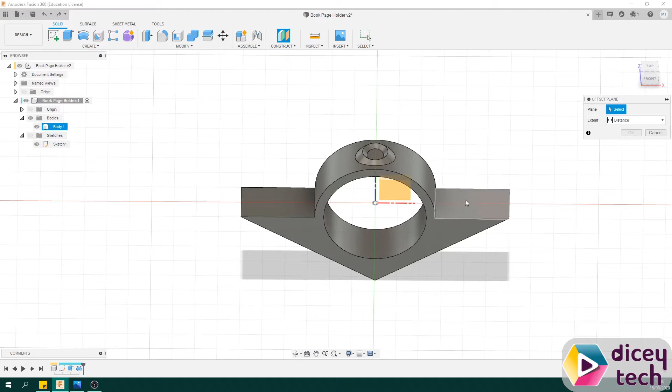First, go to Construct and select Offset Plane. Select this face right here. Drag it up until it says 13 millimeters, then press OK.

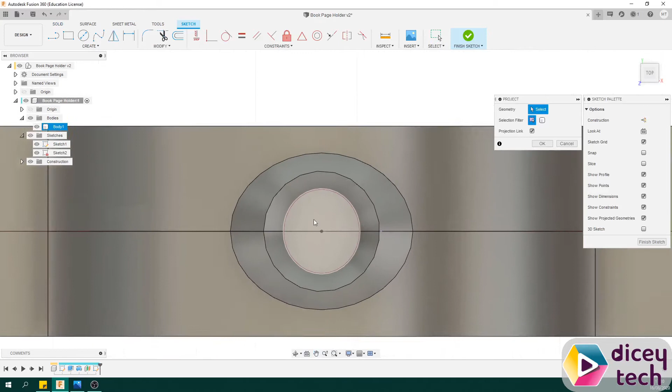After that, go to Create Sketch and select the plane that you just made, which is right there. Now click P on your keyboard and select this circle right here, like that. Then press OK. That will give us the outline of the circle there for reference.

Now hide body number 1, and now you're left with this. Hide sketch number 1 as well.

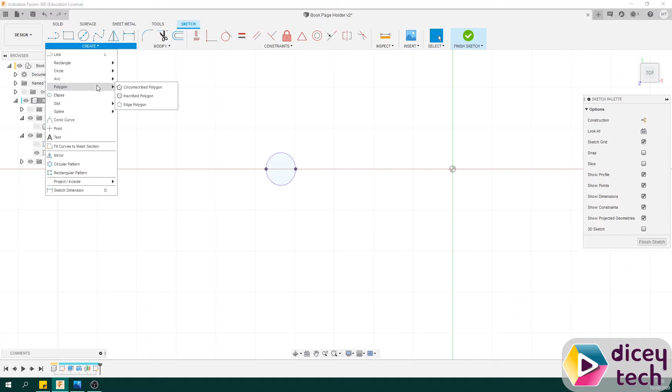Now you want to go to Create, Polygon, and select the top one. Then go to the center. It will show you the 2 dotted lines like that. Drag it out, make it 5 millimeters, and change the sides to 8.

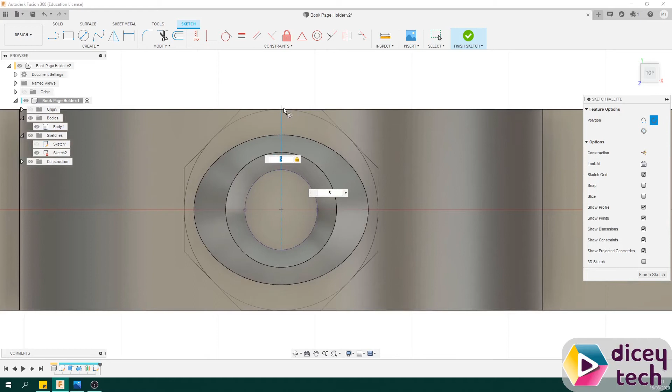Show body number 1, and you want it to line up perfectly, like this. It will show you a vertical blue line, like that. Then click. Once you've done that, click on Finish Sketch.

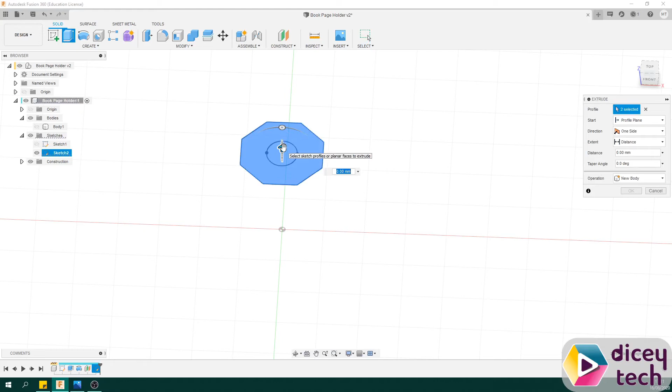Show Sketches, hide body number 1, rotate. Go to Extrude, select the sketch you just made. Make it -7, and change the angle to -45. You should get something like this.

Then press OK. Then go to Extrude again by clicking E. Select the top face and make this one 2 millimeters and enter.

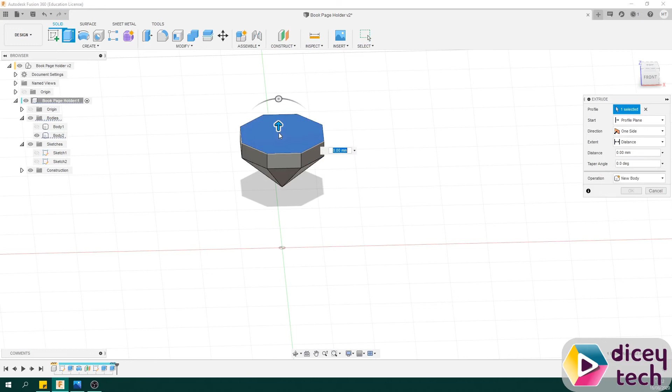One more time, press E. Select the top face and make this one 2 millimeters, but change the angle to -45. You should get something like this. Then press OK.

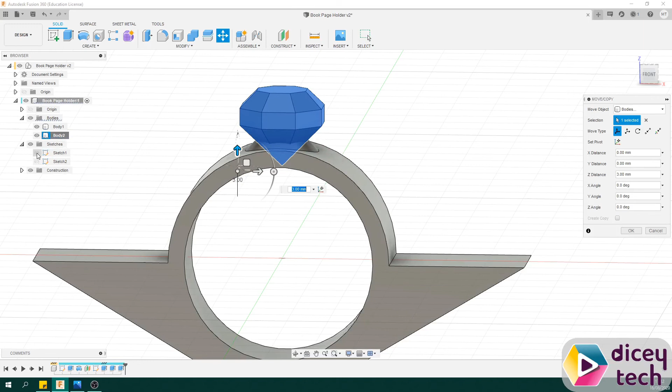Once you have that, show body number 1, then right click on body number 2 and drag it up until, if you turn on sketch number 1, this point here is right in the middle, like that. Then press OK.

Hide sketch number 1, and that's your second part done. Now press save, and that's it for part 2.